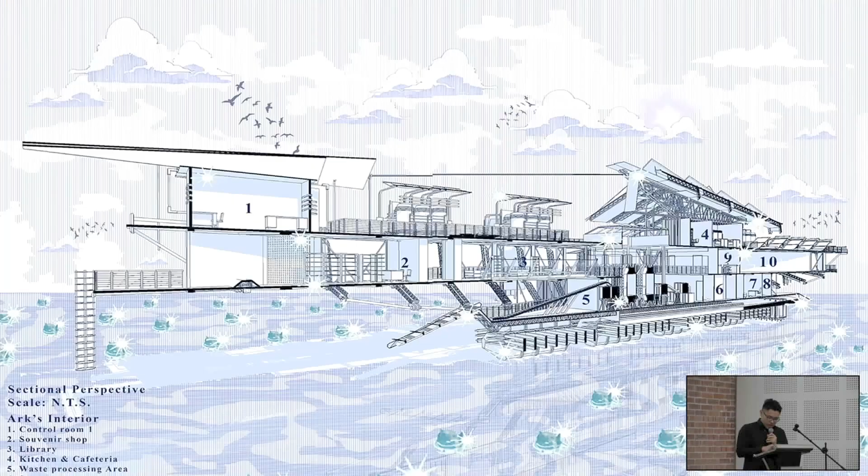Metaphorically, anticipating a speculative event allows us to predict the worst possible postulated outcomes of anthropogenic ocean pollution in the next few decades or centuries. This anticipatory ark is deployed to clean up the marine debris around Semporna.

In our quest to repent what we have done to nature, anticipatory ark emerges solving the issue of ocean debris in Semporna and eventually the 5 oceans in the near future. It is essentially designed to function as the mothership debris harvester, as you can see from this sectional perspective, patrolling the site.

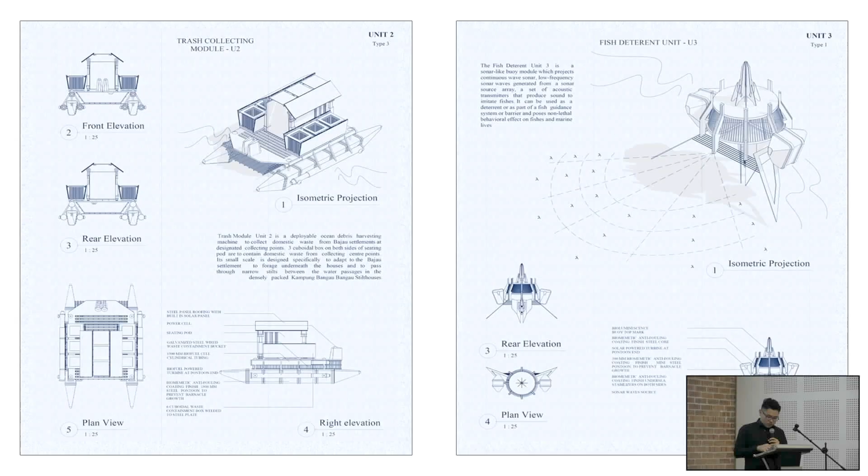It has deployable high-tech subunits like trash collecting modules, fish deterrents, and microplastic filter feeders designed specifically to go into narrow areas under the stilt houses or unreachable areas to harvest various types of ocean debris ranging from microplastics to large floating objects.

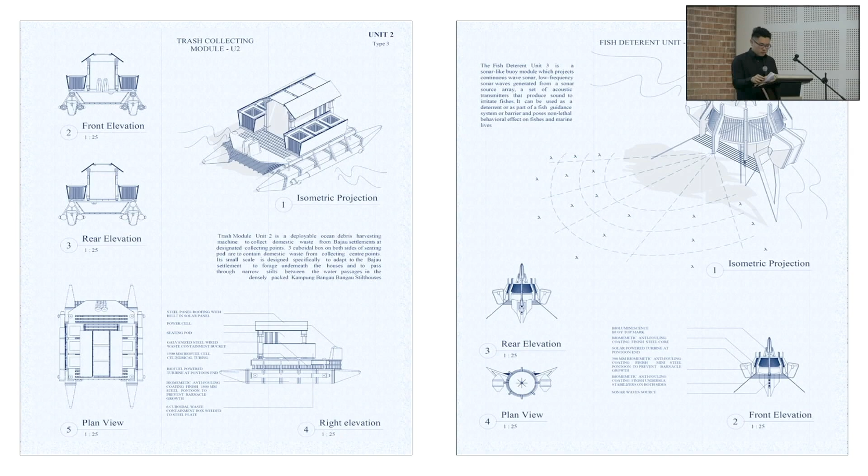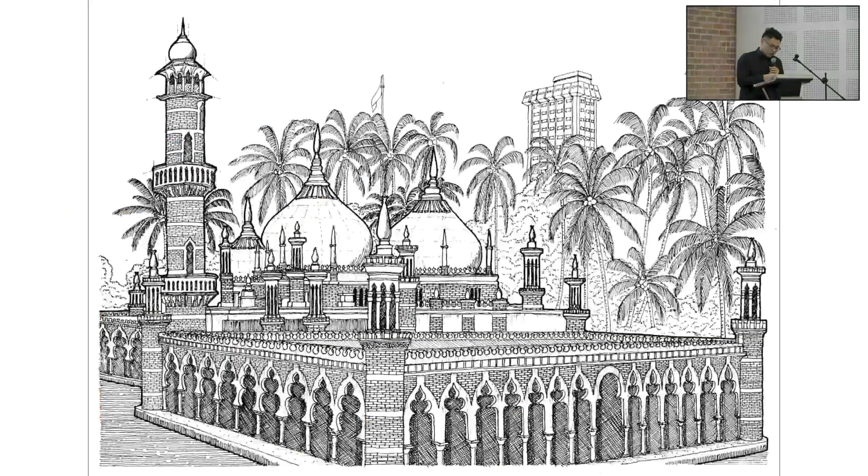So moving on to the next one, you see here is the competition hosted by PAM in early 2022, the Masjid Jami' Sultan Abdul Samad sketching competition. So this is my submission. I did the black and white fine liner sketch. I use this style because honestly I'm not very good with colors, but it also emphasizes the essence of the subject.

By highlighting the intricacy of the lines and details, it evokes a sense of timelessness, showcasing the embodiment of a deep cultural and architectural heritage. This unique combination of Indo-Saracenic, Mughal and Moorish architecture style mosque is also one of the oldest mosques in Malaysia, located at the center of Kuala Lumpur, where the two rivers, Klang and Gombak rivers met.

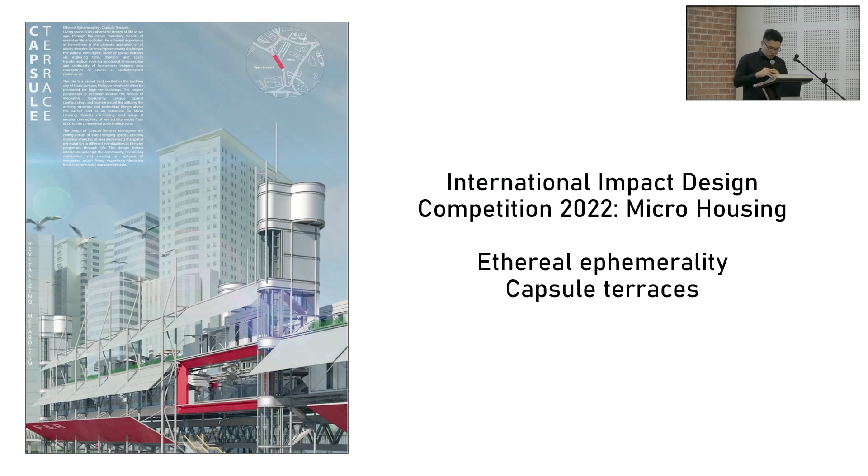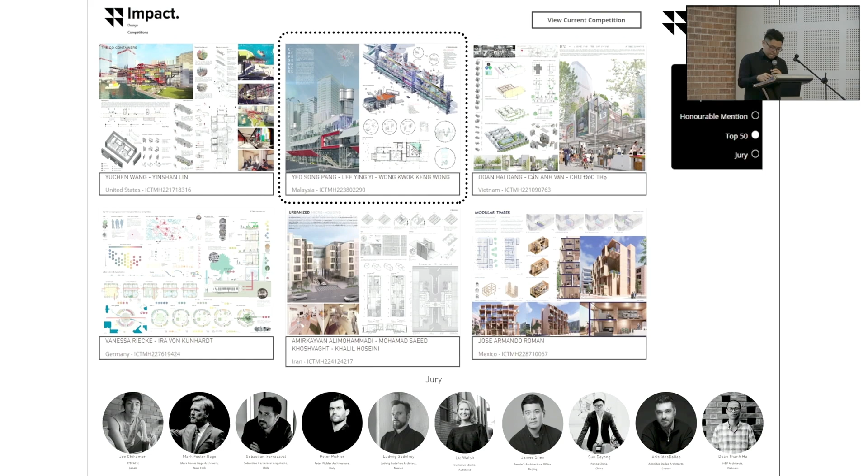Coming to the third of the quartet, the International Impact Design Competition, Microhousing. This submission was done in a team of 3, including me, led by a senior of mine. The brief is to design a prototype of a microhousing unit of less than 35 square meters that reflects the personal needs and culture of the residential community, chosen in an urban context with a relevant site.

Each unit comprises a sleeping space, a common sit-out space, a kitchenette, a bathroom, and storage. Space-saving and multifunctional furniture are key elements that tackle serious space crunch issues. The notion here is to accommodate more units on lesser floor space and at an affordable price point, especially in dense core neighborhoods or next to a major transit route.

The site chosen is a section of the Link Bridge adjacent to the vacant land and Menara UOA, tucked within Bukit Bintang and KLCC area, which will often be prioritized for high-rise building. My team and I tackled the brief by utilizing the existing pedestrian link bridge above Jalan Perak as an extension for micro-housing units. Besides minimizing land usage, it ensures connectivity of key activity nodes from both Bukit Bintang and KLCC to the commercial zone and office zone.

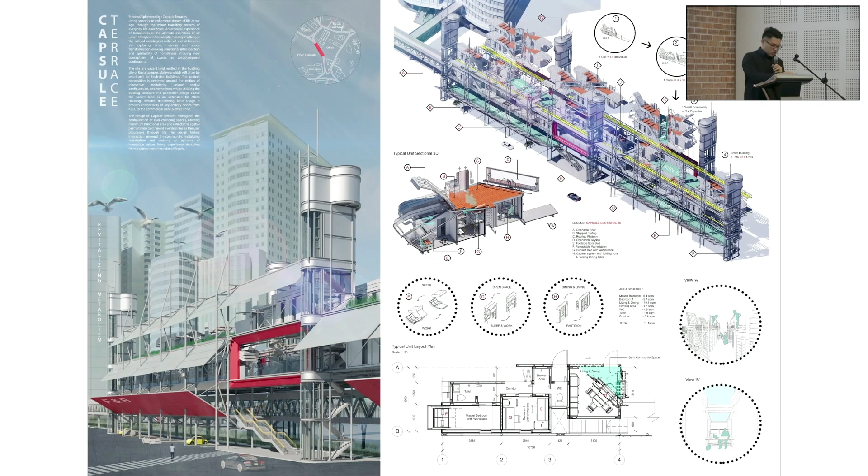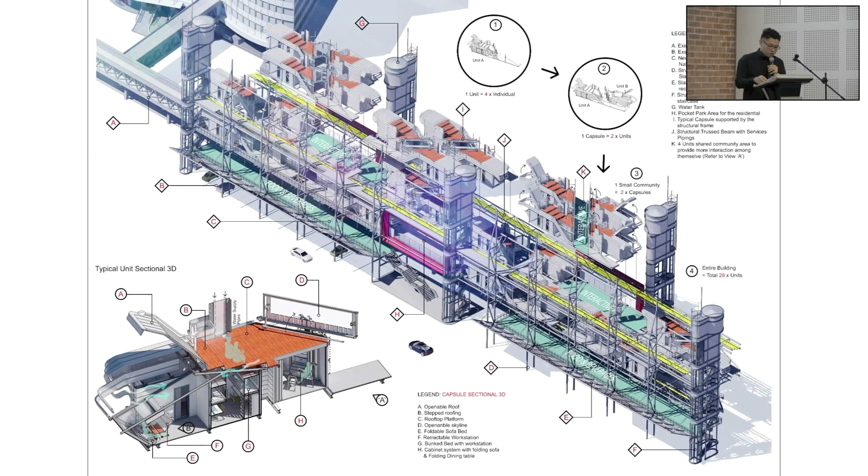Ethereal Ephemerality, the title, literally means otherworldly impermanence, challenges the natural ontological order of spatial features via exploring time, memory, and space transformation, evoking new conceptions of spaces as spatio-temporal continuants. The ideation of capsule terraces in micro-housing reimagines the configuration of ever-changing spaces, utilizing maximum functional area, and reflects the spatial permutation to different eventualities as the user progresses through minor transitory records of everyday life anecdotes.

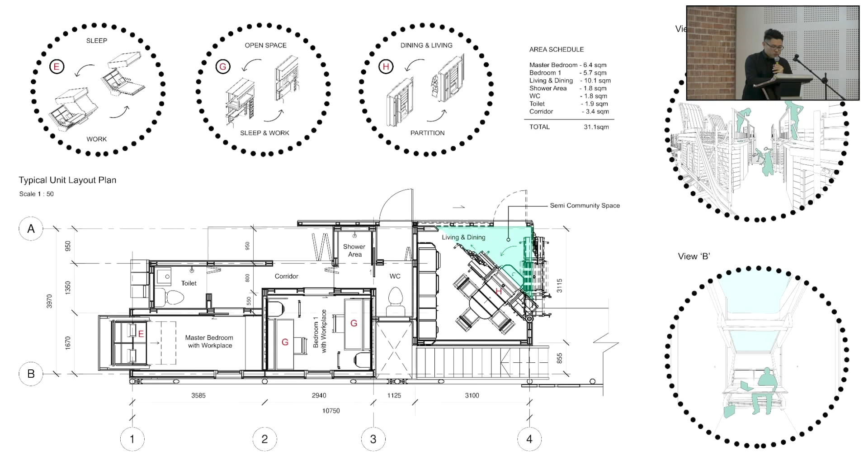Each micro-housing unit comes in the form of a prefabricated capsule assembled on-site in a uniformly terrace-like manner. The design is suitable for white-collar groups, professionals, or even expats, creating the epitome of an ethereal and ephemeral urban living experience.

Last but not least is the submission for Penang Light City Urban Sculpture Design Competition. The brief is to address Penang as the Pearl of the Orient, a gem and a melting pot of culture. The pearl symbolizes the island, and when sunlight shines upon it, everything comes alive. Light epitomizes the essence of all life, but for life to form and flourish, water must be the cradle.

So I did 2 submissions for this project. The first submission is the Light Axiom, meaning the principles of light. The sculpture proposition is again centered around the notion of light, followed by water as the core of life.

The design is inspired by the resemblance of Penang in Malay, which means the island of areca nut. Light and water metabolize the areca nuts, a symbolism of life, which are embedded in the acrylic rods at each tip of the sculpture. And when dusk falls, the sculpture will begin to light up.

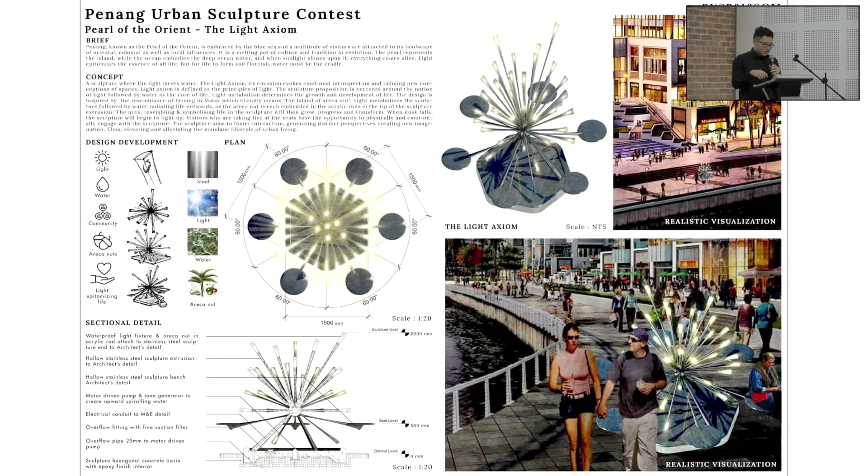This is the design process and the final rendering of the sculpture.

Proceeding to the second submission is the Spectrum, defined as the range of colors produced by the separation of the components of light by their different degrees of refraction according to wavelength. The idea is based on the concept of spatial contemplation using fundamental forces of nature - light, water, refraction, and reflection - to stimulate a whimsical user experience towards the sculpture.

The design is inspired by the resemblance of Penang Island as a shining pearl in a clam, surrounded by vast ocean water. The sunlight hits the water, and the opalized finishing beneath creates a spectrum of rainbow-like colors as the water undulates perpetually. The sunlight then refracts from the water and finally reflects to the warped steel surfaces, demonstrating how the users are seen as the pearl encapsulated by the sculpture.

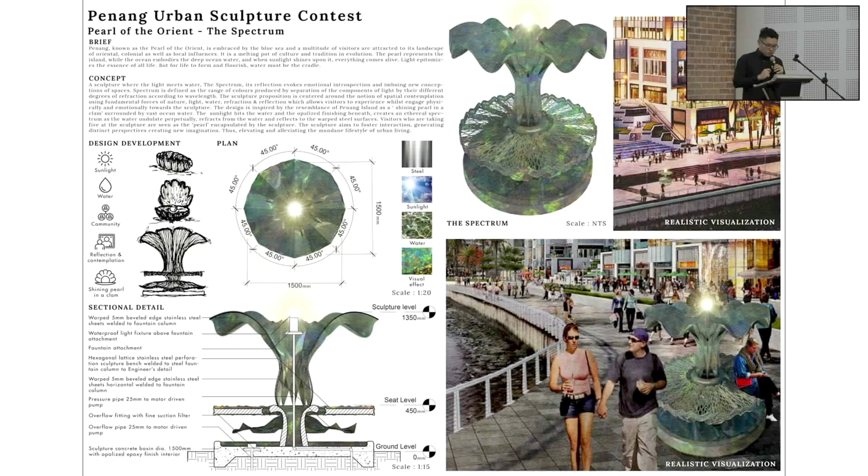This is the design processes and the rendering. I personally like the first one better. However, this submission was the selected one because it follows the brief.

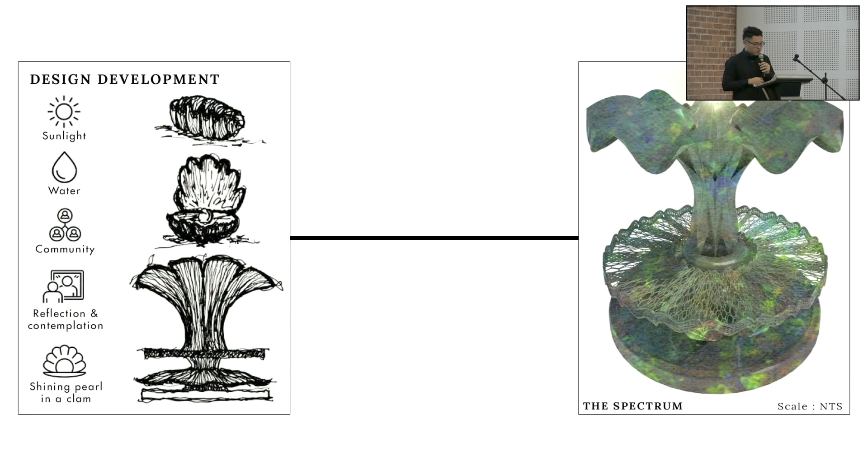And so I've come to the end of the sharing, and thank you for your time. I hope my sharing benefited all of you here today. Thank you.

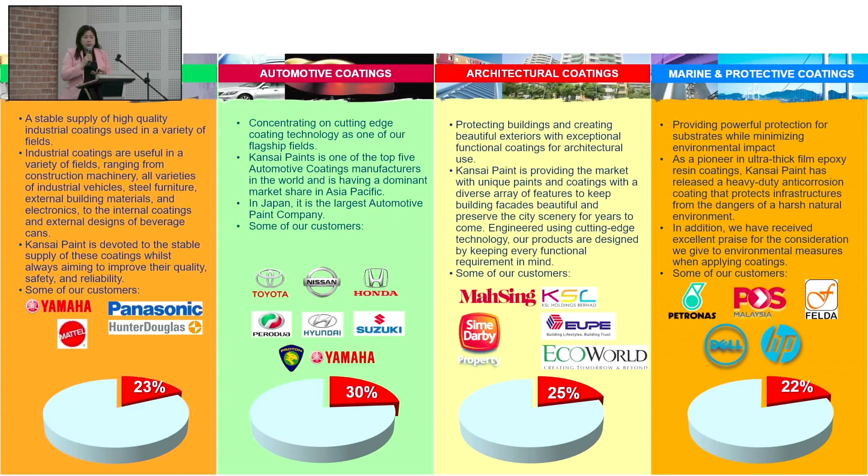So this is our report card, not so high profile, but actually we have quite a good reputation globally. We are number 1 in Japan for automotive coating and number 2 in Japan in group sales. And in Malaysia, we're actually number 3.

Number 3 in Asia Pacific and number 9 globally, so we are among the top 10 paint and coating companies. We have Kansai Paint, 100% owned by Kansai Japan, and Sime Kansai, 60% owned by Kansai Japan and 40% owned by Sime Darby Motor. And Sankora, one of our partners, owned by Kansai Paint. If you have used texture coating before, this is actually under the Sankora brand. So all under our Kansai group.

Besides that, we are the leading automotive coatings provider. Most cars in Malaysia are actually using our coating, I would say 80% of the market share. So no matter the brand, you are likely using our car coatings, which protect your vehicle under the sun, under the weather, or even rain. We apply the same technologies into our coatings as well.

Now car coatings have already moved to water-based. You will be surprised, Perodua is the first company that actually used water-based coating for their top coat.

We also supply to the biggest toy car manufacturer in the world, Hot Wheels, all using Kansai Paint, because this one has to meet child-safe requirements, since we expect children might bite it. So this product is actually produced on a special production line, because they have to be aware of other chemicals.

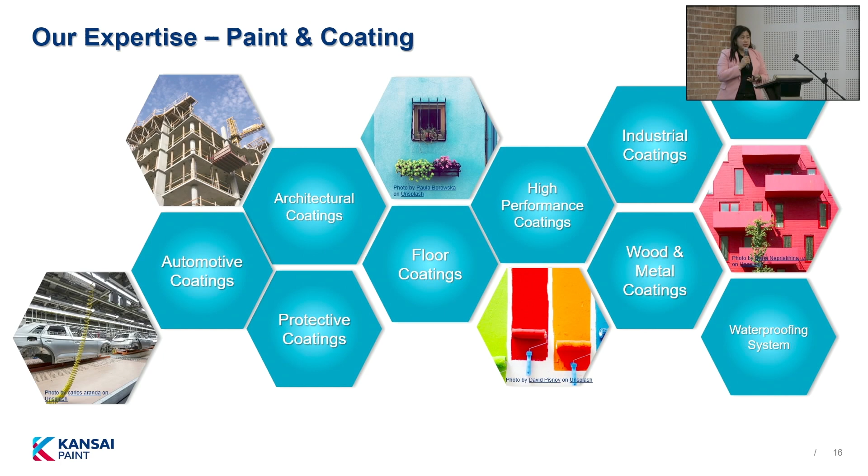And of course, for exterior, whatever we mentioned is used for most of your building and design. So not to worry, I have my color consultant team to give you a color scheme. If you have problems choosing color, let us advise you.

For interior, I have a wide range of products. Whatever we sell to project, the same product is available in retail. We don't do any different grade for project or retail, all our products are one grade for both segments. That's why I welcome you to my factory to see how we do our manufacturing run. We don't actually have different qualities for project versus retail.

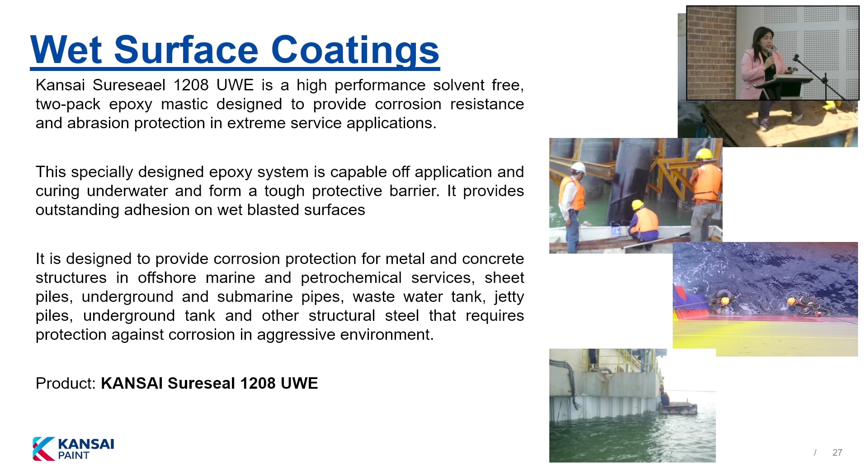So today we'll highlight more on the protective coatings. I think most might not be aware that we actually have a lot of good products. This is underwater epoxy, which we supply a lot to offshore, especially for bridges, jetties, or whatever is painted under the water, because you cannot remove the seawater. So this is a solution for you.

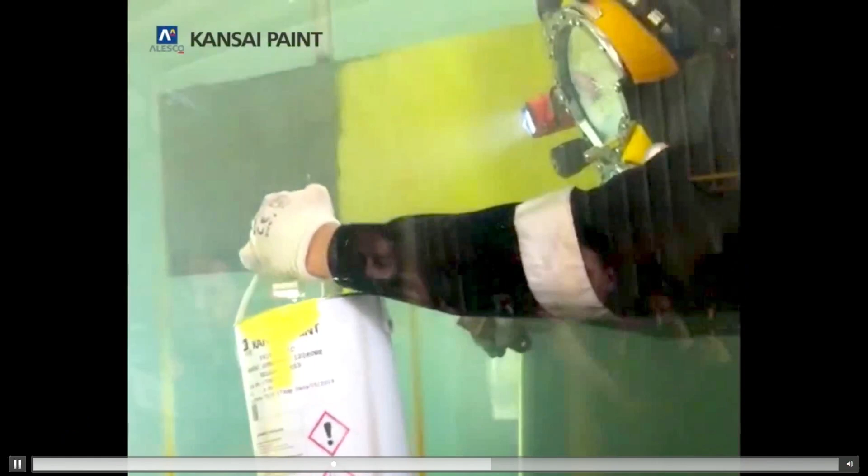I think just now KK did mention you have an ARC project. I think maybe you need this product for your project as well. So this is our technology, and we sell quite a lot to oil and gas, especially offshore, and also for bridges. We also have anti-carbonation coating, one of the JKR aspects, if I'm not mistaken.

We completed the Penang Second Bridge. So they are now doing a tender job, it's going to kickstart soon. It's also a Kansai product.

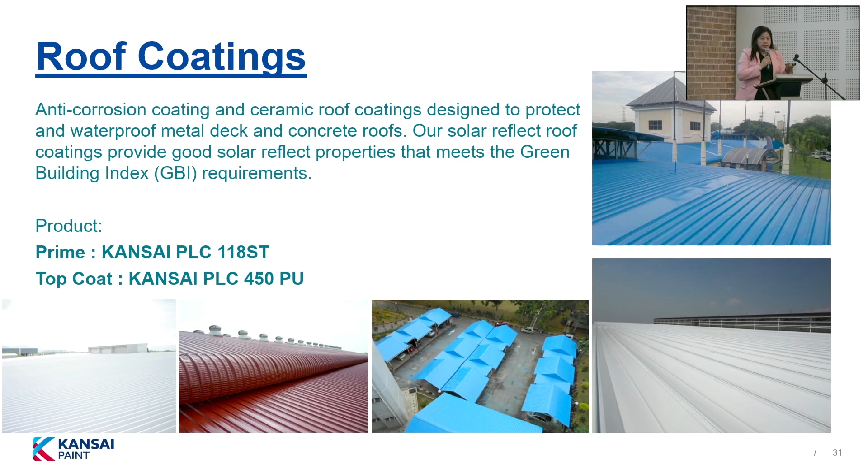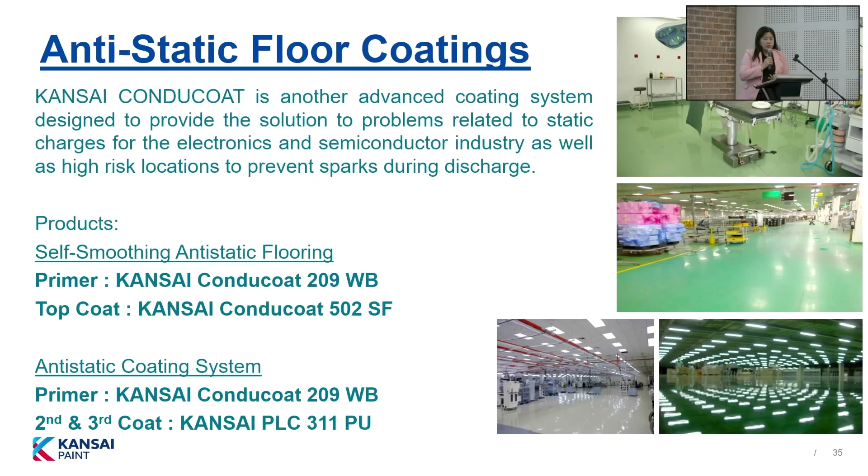And of course, the roof coatings. This one is more on the higher grade compared to normal roof tile paint, which falls under decorative. And this is what we do for your metal roof repainting. Yeah, some of our projects. And of course, we have concrete protections. We also have anti-static floor coatings, epoxy flooring, which we also have in retail.

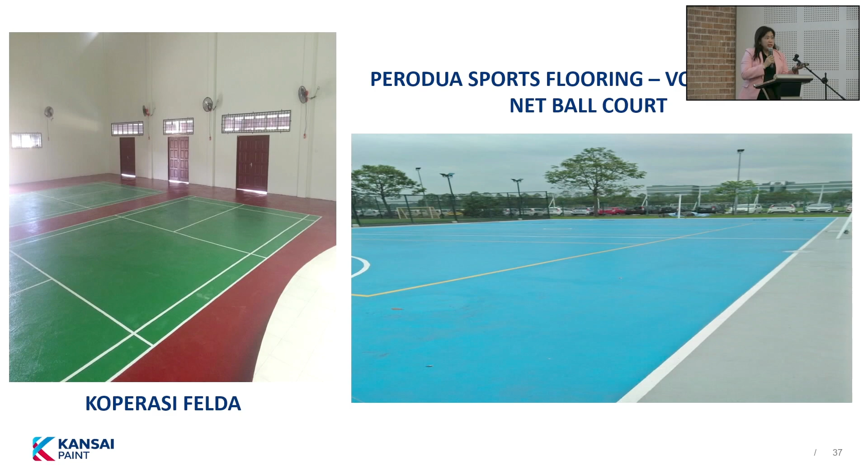And you can have some panel outside, which we brought it also. And we do some sports flooring. And recently, we also do some pickleball court. I think it's quite famous, the latest project actually takes up 7 colors for a pickleball court.

Our team actually gives you the proposal of what color to use. This is along Federal Highway next to the Subang Perak area. Yeah, this is Aurora @ Subang Jaya by Sime Darby.

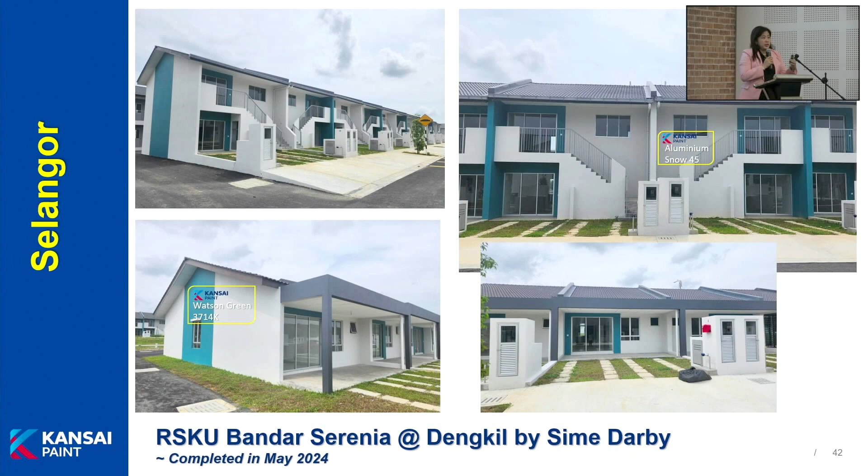And also we completed one Rumah Selangorku, and this is the color that we proposed. Of course, as we know, exterior color is sometimes a bit sensitive. That's why we have our color consult team, our spec team, to choose the right color for your project.

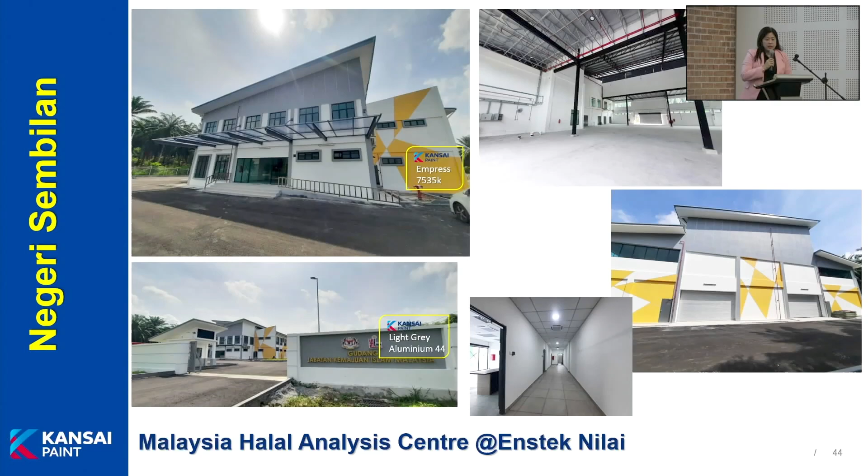This is our project, and we also do a lot of repainting in this segment. And for Aeon Bukit Indah, they are using exterior paint for interior. Yeah, they are using our Kansai weather coat for their interior.

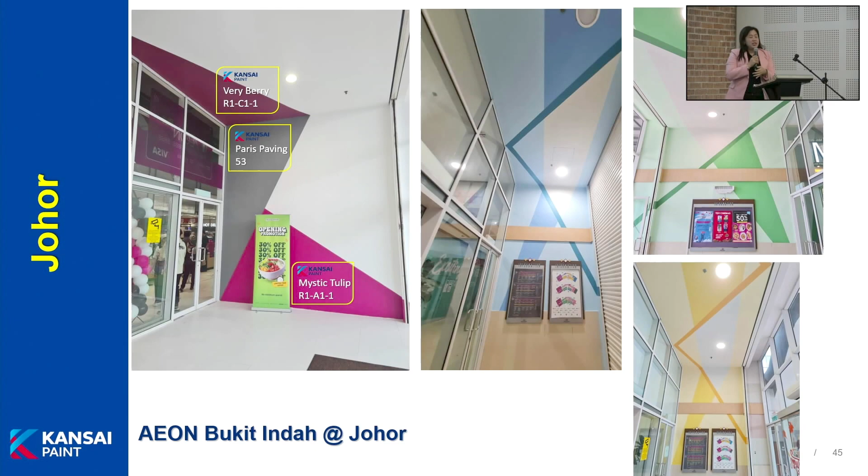That's their requirement. And also, we have a Tabung Haji project, which we have 2 different tones of green and gray. So in our Kansai, we always look at solutions for our buildings, how to make them better.

So this is one of the projects we done in our own factory. We have a very serious crack wall, you can see. So we painted this in October 2023, which is actually more than 12 months ago.

We actually wanted to see, if let's say we don't repair the crack line, would our product settle this problem. So after we checked, after 12 months, more than 12 months, actually it really helped. The building crack doesn't expand, and the paint color also hasn't faded after 12 months.

So we always have the solutions for you. If let's say your building has any problem, come and talk to us, we will give you the solutions. Of course, this is not a normal paint and coating, it comes as a special coating.

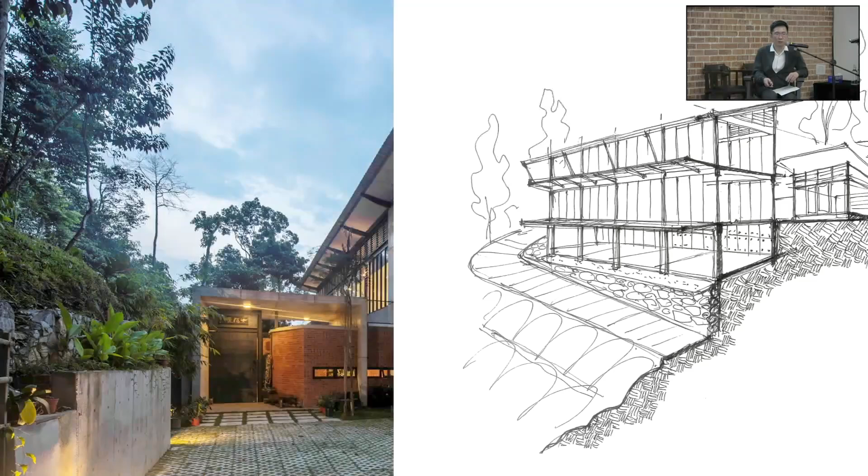This whole pavilion is a 2-story wing. It's actually the living dining room on this level, and then all 3 bedrooms on top. So this is the entrance gate, and then there's a moon gate here. And then the last function, the third function, is a guest room wing.

What he wanted is because he traveled quite frequently - this is before COVID - he wanted the building, the guest room and the pantry and the kitchen area to be able to be used by his relatives or friends or people close to him when he's away, without disturbing his private living dining space and things like that.

So it's with this program, plus on a hill slope and a limited flat area for the courtyard, so we try to derive a schematic and layout to try to have all these different functions staggered and layered together.

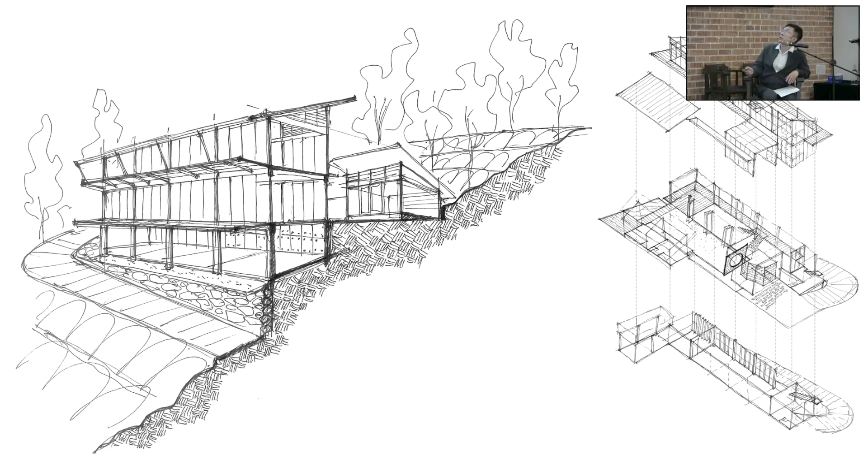Okay, so this is how it started. This is the flat area, roughly. Before I start, there's a first flat area here on site. This is a car park for the public, for his friends. So from this flat area, you can walk up here or drive up here. So the private car park is on top.

So this is the gallery and his studio. And then this is a living dining, kitchen, and then this is a bedroom, this is a courtyard, and then this is a pair of guest rooms on the other side. So, and then if you look at...

If you look at this axonometric, this is a road coming up, and this is an entrance, and this is a gallery, and this is the artist studio, and then there's a flight of staircase going up here, reaching this entrance statement, and from here there's a moon gate, and then you're facing the courtyard.

And as you can see, this courtyard is flanked by buildings on three sides. One is a 3-story building here, and the other side is a pair of guest rooms, and then there's a private corridor, and then this wet kitchen here. And then on the fourth side is surrounded by this infinity pool.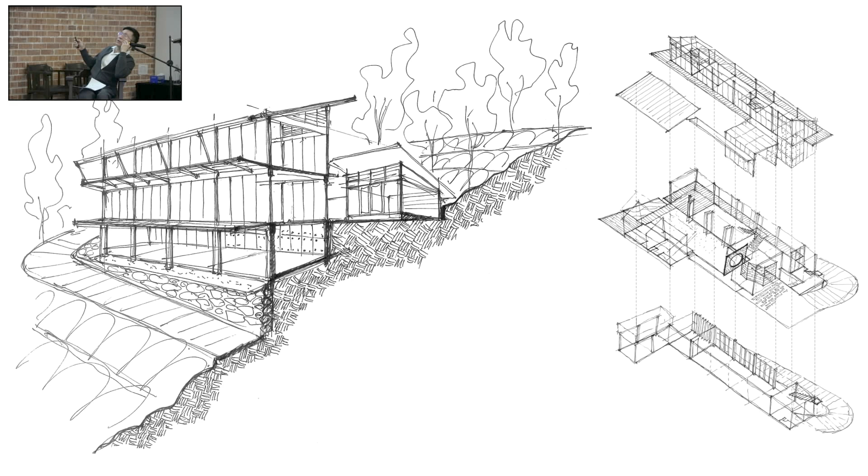So from this side, if you look out this way, all the way, you can see Genting Resort. And then you have a private staircase on the inside. Then this one can go up to, on the first floor, there are 3 bedrooms here for him and his kids. So this is a very simple but sometimes yet quite complicated layout.

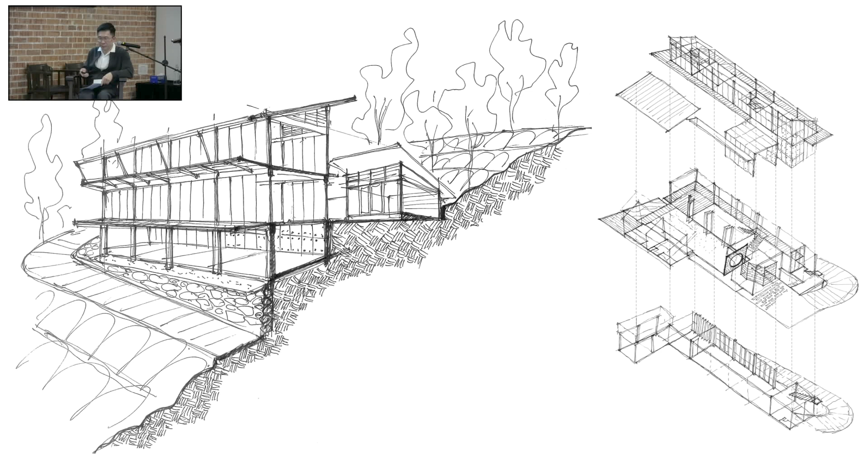Yeah, so this is the plan. I think I'll hold it.

Hi, okay, this is the plan. So this is the driveway coming up. Oh, much better.

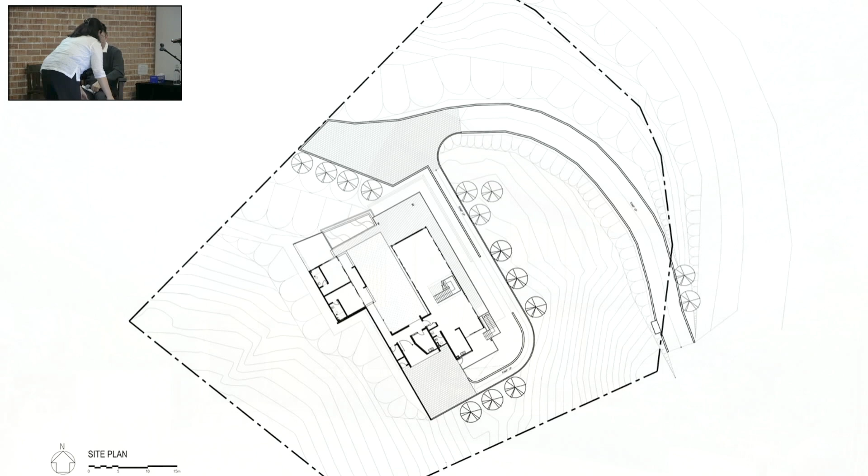Okay, this driveway coming out, this is a public car park. So you're coming out to here. This is an entrance and then the moon gate. And then this is a private wing. You notice that here at the end of this private wing, facing the Genting Resort, and so is this swimming pool. This is where he hangs out most of the time, and then there's a courtyard here, and a pair of guest rooms here.

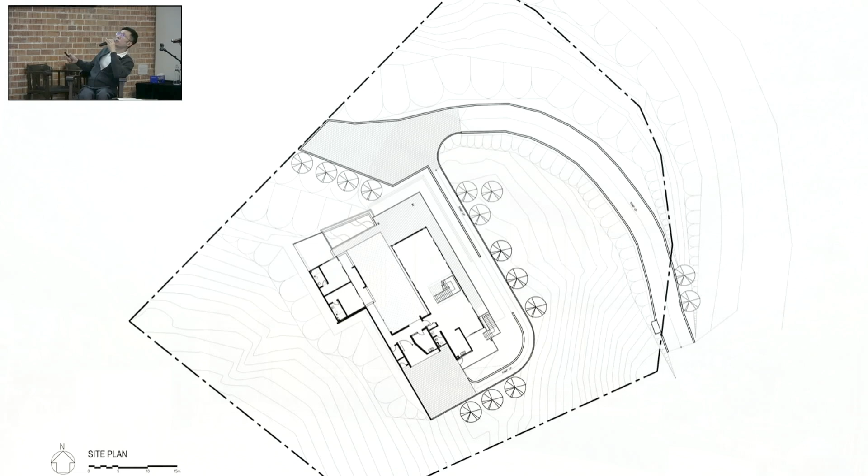So meaning that the people who stay in this guest room, when he's away, he just has to lock up this door and all the glass doors here. So people can continue to use the pool, and maybe make some Maggi mee here. I myself, with my family, stayed here over one weekend when he was away. Test first.

As I mentioned, the existing site elements are quite important when we adopt the design. As you can see, these are stones discovered on site, so we use them as part of the retaining structure. There's also some timber on site, but untreated timber we wouldn't use structurally, maybe for landscape elements instead.

The whole building, the 3-story wing, is staggered up. We try to make the design look light, especially on the top two floors—that's why some structural members use steel I-beams and things like that. The lower ground floor, the gallery, uses heavier off-form concrete.

Even though this is quite a modern design concept, for this house we try to infuse traditional elements, like wood, and to a certain extent vernacular elements too. We try to play with different elements. We also didn't want a hardcore, cold modern building in Janda Baik, where the priority is actually the landscape and the trees around it.

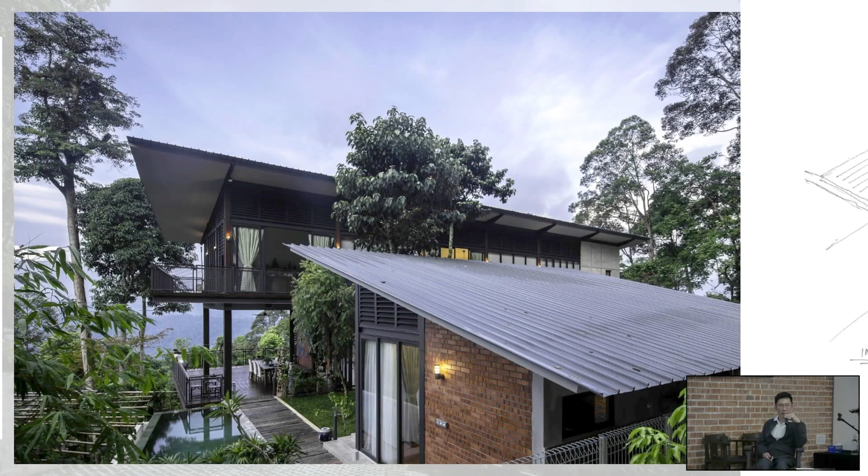Okay, then as architect for this project, we also try out different detailing. What we tried here is to run a staircase. Usually we have an I-beam stringer, right? But a single stringer or double stringer, I thought it's a bit boring.

So we tried to have a bit of fun. We cut the stringer into half, so it becomes 2 T-shapes. Then we flip the two T's together, and it becomes like a butterfly shape. Then on top there's a steel plate support, so it becomes like a butterfly kind of support, and a solid timber plank rests on top of it. Sometimes when we do this detail, frankly, I'm also not sure how stable it is.

So until it's up there, then you can see another staircase with a single stringer—some of my young architects went out and jumped up and down, so it's so far so good. That's the beauty of doing a bungalow—there's a slight flexibility, not too much. Well, at the end, safety is still paramount—we cannot compromise on safety.

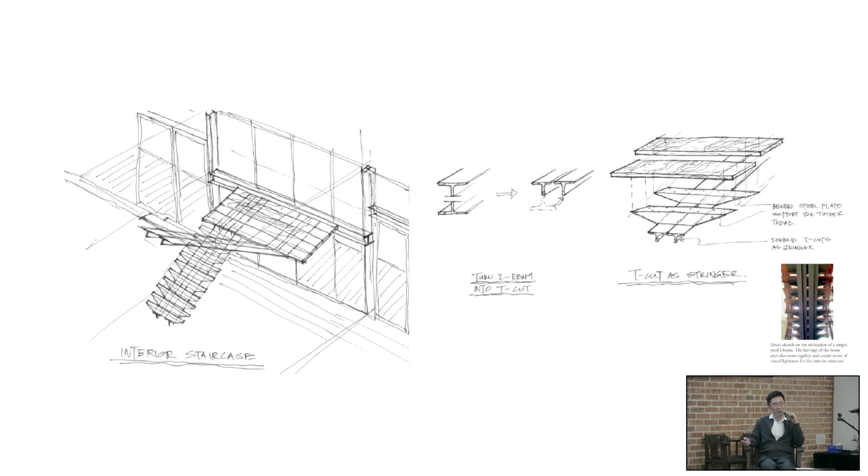So just now the butterfly staircase is this one—you can see here from the underside. And then this is a single stringer staircase. We actually reduced the size a little bit—the original size designed by the engineer was too humongous, and it looked really bad. So we reduced the size a bit, and it looks okay, and it's holding up well.

So ever since then, I've been using the same, similar detailing, with cantilever, one beam, things like that. Sometimes the owner says he is my guinea pig, you know, so I try this out on him—partially it's quite true. So this is the balcony.

This is an important element of the building, roughly about 2.5 meters in cantilever. Even the handrail is all wire mesh, and at certain height there's a timber handrail. So in short, whenever your body touches a certain architectural element, to create a certain level of comfort, I would instill some kind of timber—though not everything is timber, because that's just not right.

And then you notice the steel column here—the I-beam column is all cladded with timber, so that we can hide the wiring and cabling, the M&E, inside. And the timber board allows one to mount the wall light. So there's a lot of this kind of detailing we have to work through—it was an interesting experience.

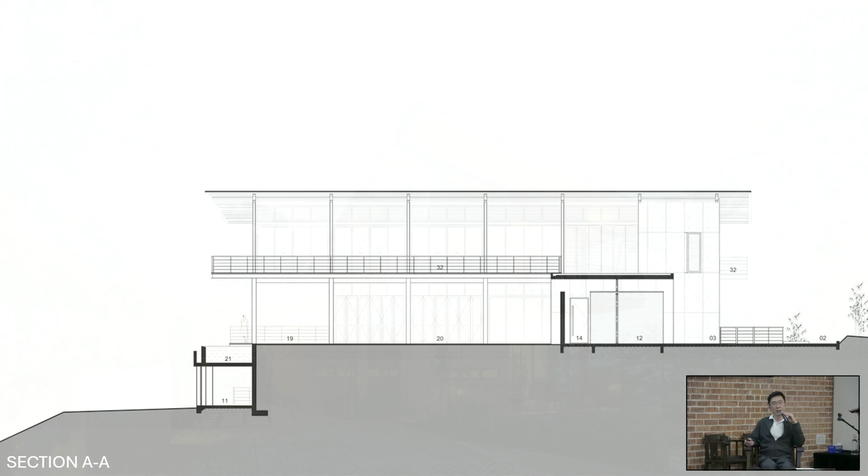So this is some of the design, the section of the building. This one is cutting through the Moon Gate and the infinity swimming pool. Then this is the main section.

This is important—as I say, this is a flat platform available on site, so we hardly changed it. We just trimmed the side a little bit to create a guest room, and here we allowed a 3-story wing. So from the courtyard, the building looks like 2 stories max, but from here it looks very tall—the first few photos, it looks really, really tall.

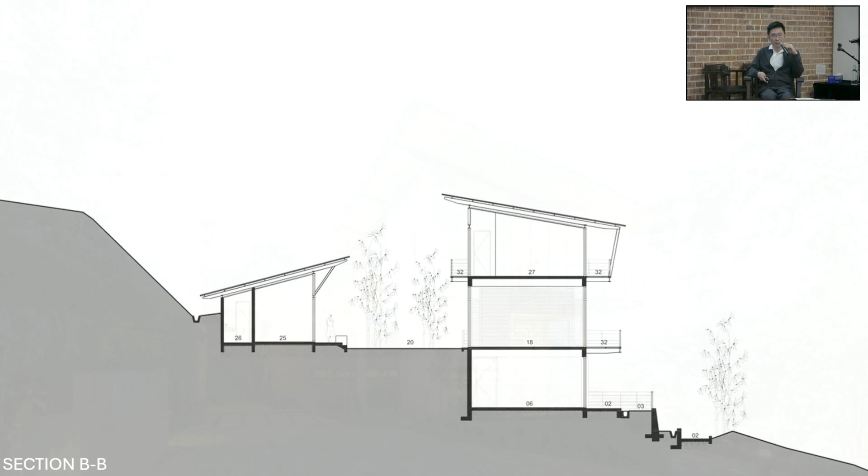Okay, so this is how it fits on site, which is quite a nice view there. It fits quite beautifully with the site.

Okay, second project is the Deck House. I did this probably 2010, 2011 at the time, so it was an experimental project. Again, this owner is also a very famous artist. That's why artists are doing very well, they hire architects. So another very famous artist.

When they first approached this, they just wanted a small weekend getaway house without any major function, any serious function, because they won't stay here for long. So the thing they want is about 2-3 bedrooms, maybe not a real proper kitchen, but some kind of pantry. But they enjoy outdoor life. As you can see, most people when they choose to stay in Janda Baik, it's all about outdoor, indoor is not so important. In fact, if the weather allows, most of the time they'll be outdoor, drinking tea, hanging out with family and friends, or cooking outside, things like that. So that's why the internal program, as long as it's comfortable, I think it's good enough.

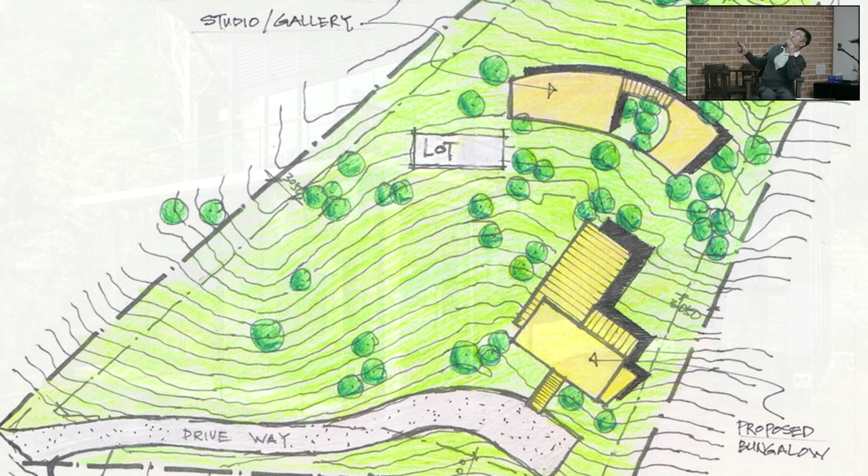For this site going down, I find that the major habitable space is more efficient if it's going down, and the client gladly accepted it. So when you first enter from the bridge - this sketch early on never got built, it's only this. You see the driveway coming down, you cross the bridge, then this is the main area. Then you have a series of flying terraces or decks, so when you come in here, half of it is a void, half is a master bedroom. You can go straight to your master bedroom or take a staircase down to the living room underneath.

You see the contour is fairly even. Notice that this is very important - the contour is fairly even, okay.

This is one of the earliest sketches, and at that time, 2010, there was no SketchUp yet. There was AutoCAD, but no SketchUp, so he had to still draw by hand.

So this is the idea: you have a car park, you walk over a bridge, and there's a void or a master bedroom on one hand. Then you come down, and this is a living dining platform with a big, huge flying deck.

At that time, I had a bit of fun. I thought I wanted to make this column really slanting, 30 degrees. My engineer objected - in the end, you only get 17 or 18 degrees, because they said it's too dangerous. So it's on this kind of language, the building grows slightly bigger as it goes down.

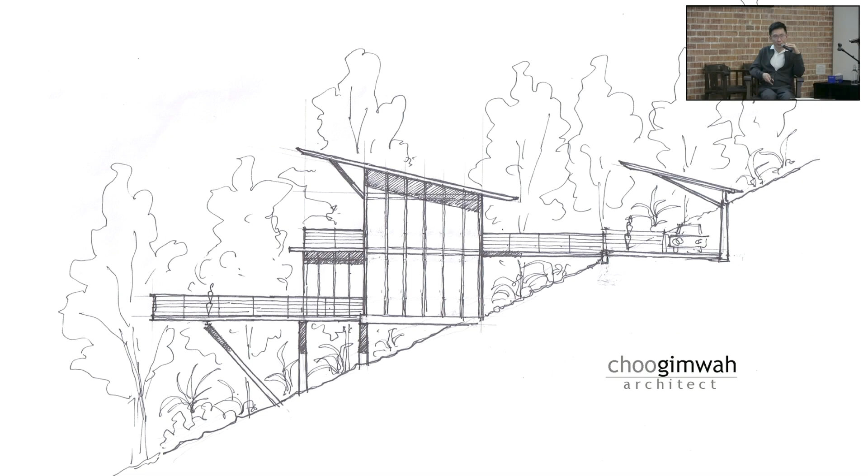Okay, so on the top left is the master bedroom at the highest level. This master bedroom has an almost 7-meter wide frontage. So imagine every morning you wake up, you open up all the sliding doors, you have 7 meters worth of view. It's quite breathtaking. On one side of the master bedroom, you can look down to the living room through the glass.

And then all this aluminum louver is for ventilation. So this house, practically, you don't need much aircon. Even till today, it still works quite well. Then coming down here into the living room, you can imagine this is the living area. This is the IKEA furniture, and then this is a small dining room and small dry kitchen.

And then this is the concept of the building. Since they like outdoor living, I always thought that normally we only consider infinity pools. So in this case, I thought if I have a flying and yet infinity deck, it would be quite good. So I gave it - this deck is like 13 meters long, 6.8 meters wide. It's like going all out. As you can see, at the end of this deck, a certain part, you can touch the leaf.

And then all this - but to make this look floating, again later I'll show you that you need quite a bit of exploring, tweaking, or detailing. And then this is the terrace - you can see a layer of terraces. This is outside the master bedroom. This is a balcony, going down is a deck.

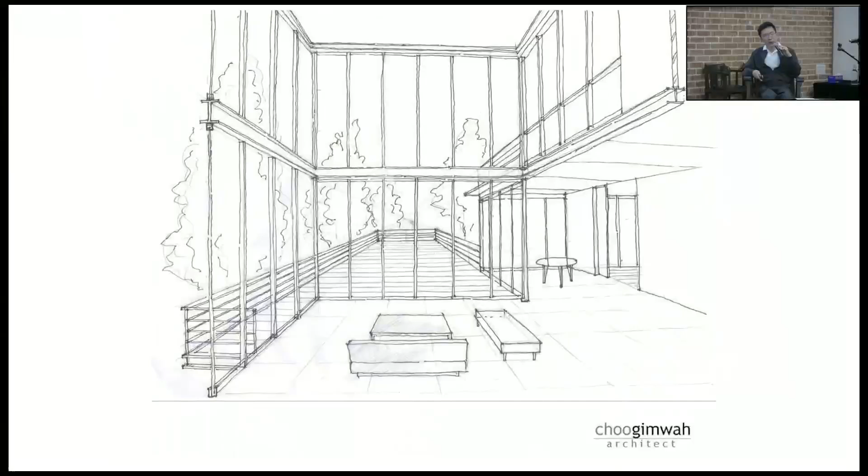Now this view, the space, is what I hope to achieve from the beginning. Again, without SketchUp, using freehand, there's no choice. So this kind of follows, but of course this one is almost a really long infinity deck, and I want the space to be as open as possible.

But frankly, over the years, a lot of people ask me, 'Oh, there's so much glass, would it be hot?' It's a valid concern. But fortunately, in Janda Baik, the heat factor is slightly less. If I were to do this project in KL or Bangsar, you'd have to be more careful, maybe not so much glass, more louvers, things like that. But in Janda Baik, you have a bit of leeway because the climate is slightly more moderate.

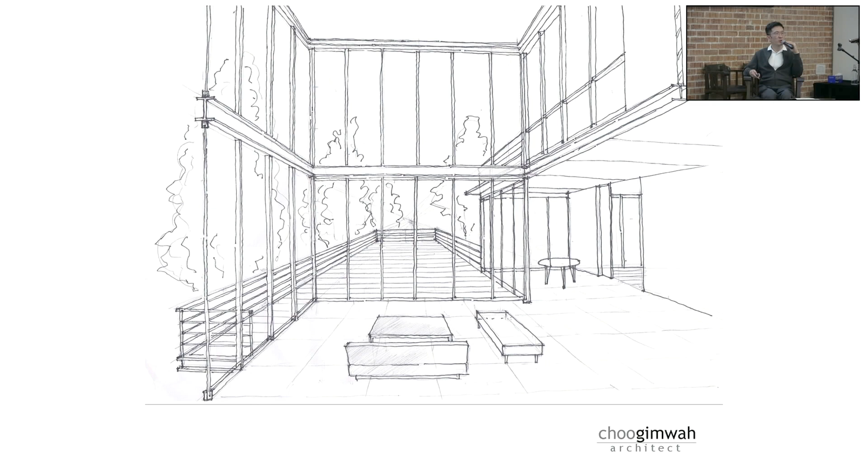So this shot is as important as the other shots, because it shows especially the deck, the infinity, how it layers. This last bit is cantilevered, on steel, timber, on steel anchored to the concrete. But from the outside, I wanted to make it look like it's floating, and this is slightly slanting. So this is actually quite technical. It's not as people thought, like wow it's floating, but it's very technical. We have to carefully construct each and every element.

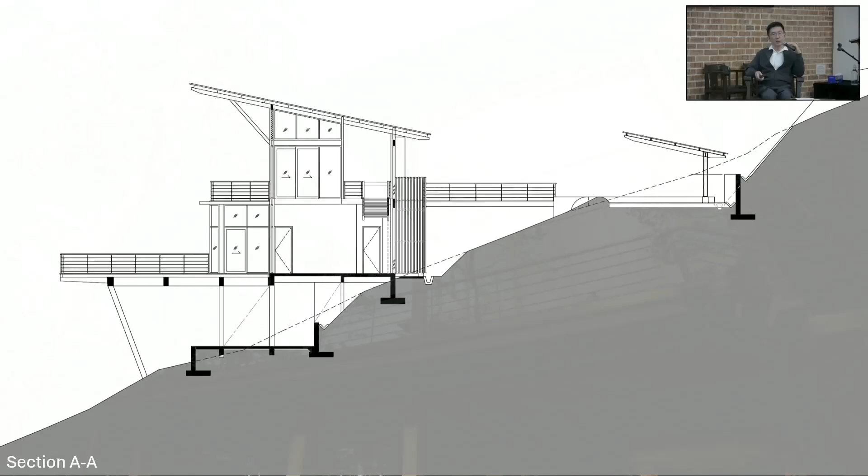This is a section of the building cutting through the deck. So the deck is all floating, it doesn't have a concrete slab. You can see the space, and on both sides they have a huge cantilever metal deck roof.

Okay, this one is this project called Small Haven. One of my friends advised me on this name. It's quite cool, took the client a while to digest and agree to this term. Anyway, this is a very, very small project, probably the smallest building I've ever done.

As you can see, this site, the owner and his family and friends bought up quite a number of pieces of land around the whole vicinity. So in the future they're gonna build a small village for the uncle, auntie, whatever it is. So to be sure, he wanted to build a tiny dwelling of maybe 1 bedroom to try it out.

See how he likes living in a jungle or semi-jungle environment. So for this site, the challenges are different. It's quite flat, in fact one of the flattest pieces of land I've ever worked on. So it doesn't have all this up and down hill, horizon view, trees. So it presents another layer of challenges. How do you make this? And furthermore, this building is visible from the road. The first 2 buildings can almost not be seen from the road, so privacy is no problem.

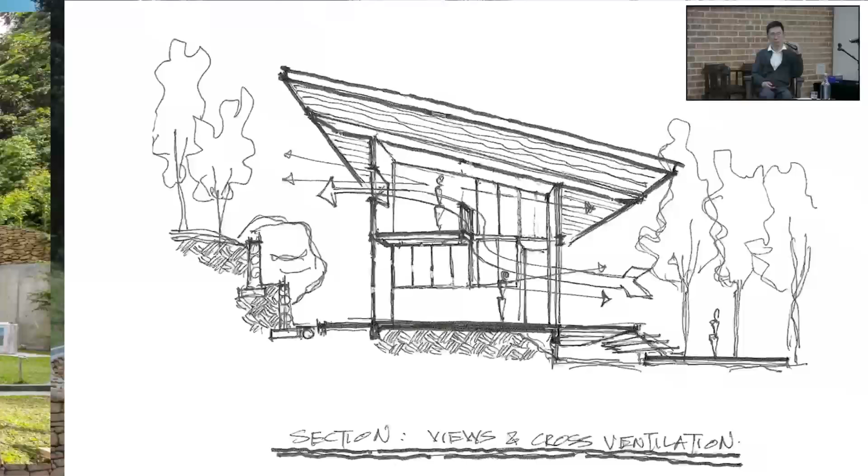Since it's a single story building, and because of the single pitch roof, on the higher pitch side I managed to achieve a mezzanine floor. So the one below the mezzanine is a dining and kitchen, and on top of the mezzanine is just a mezzanine. This mezzanine floor has a window on top, looking out, which other than allowing ventilation also allows a viewing point for future development here, because these are natural slopes.

Surprisingly, when they started digging for this project, doing the earthwork, they found quite a big boulder on site. So we did not move the boulder. We turned it into part of the focal point for part of the building. This is a humongous boulder, and it's quite majestic looking, which I'll show you.

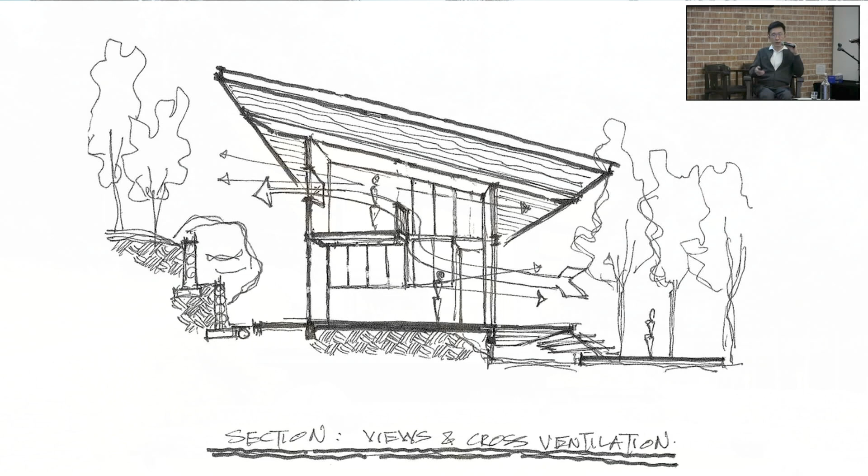This is the concept and layout of the building. Okay, lower platform coming out, timber deck all around. Again, we have a big deck here where they do most of the day-to-day activity. In fact, they have meals here, they hang out here, things like that. That's why in a jungle site, you always need some kind of balcony, deck, terraces.

Okay, and then this is the indoor. You come in, it's a small kitchen, and then there's a TV room here, and then a spiral staircase to go out to the mezzanine here, and the rest is void. And then this is the one bedroom, only one bathroom.

And then this is the boulder at the back. So this boulder serves as a focal point for the bathroom and outdoor tub.

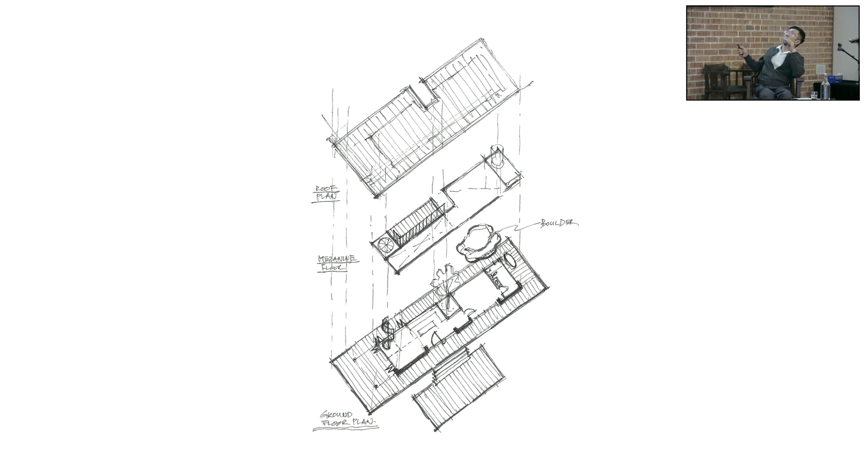So this is the site plan. Because it's going up a few tiers, we also use the rubble wall to form a few layers of terraces here in a random and organic fashion, so that it's not the usual kind of straight line thing, because the level going up is not very high.

So that's why this building, even though it's tiny, it's very small, but because it's so small we can do a lot of things that a 2 or 3 story building cannot. So as an architect, sometimes maybe when you're given a small job, it's maybe not so bad.

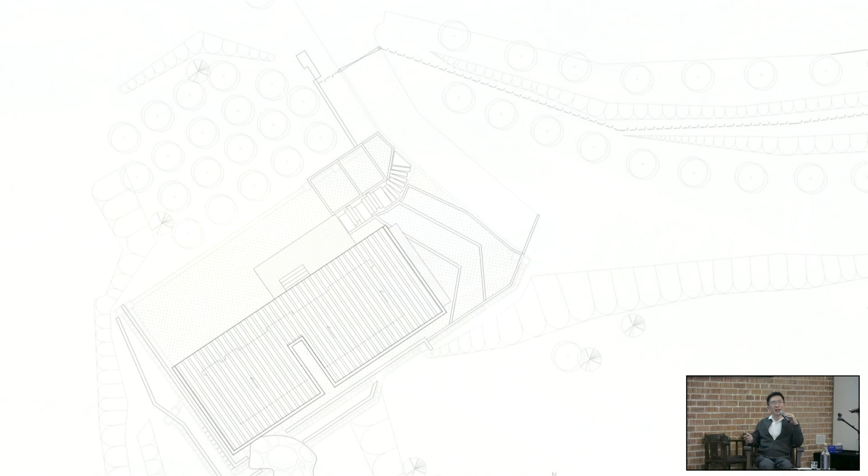So this is the section of the site. This one is mainly to show the platform. As you can see, a few landscape terraces, all again using the rubble we discovered from site.

Yeah, this is the building section. This is a mezzanine floor, all timber deck, all timber. This is not deck, this is timber plank.

Because this owner is into timber supplying, lumber, he himself has lots of nice merbau timber that he used for inside and outside. Some of the timber slab here is about 40, 50 mm thick, it's seasoned timber, seasoned merbau. He won't use it for outdoor unless it's right, and even though it's merbau, he told me he guaranteed it, because this is better than Chengal, since it's very seasoned, very old.

Yeah, as you see the deck here coming out, this is where they hang out. In fact, this deck, the owner told me, during the whole COVID lockdown, his family and the 2 kids stayed there. Quite nice, imagine COVID lockdown in such a nice environment. And the 2 kids would not sleep inside, they camped outside.

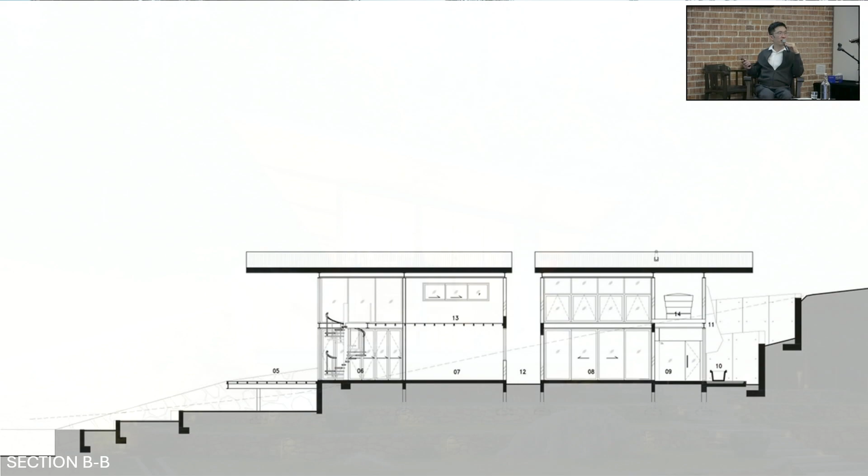The husband and wife slept inside the bedroom. The two kids had two tents, they slept outside. So they enjoyed it, you know. Of course, there were a few dogs running around in case an animal came in.

So even though again this is a small building, the outcome is quite nice. In fact, the impact of this building is not much less than some of the bigger buildings, you know, from my exposure dealing with potential clients, things like that.

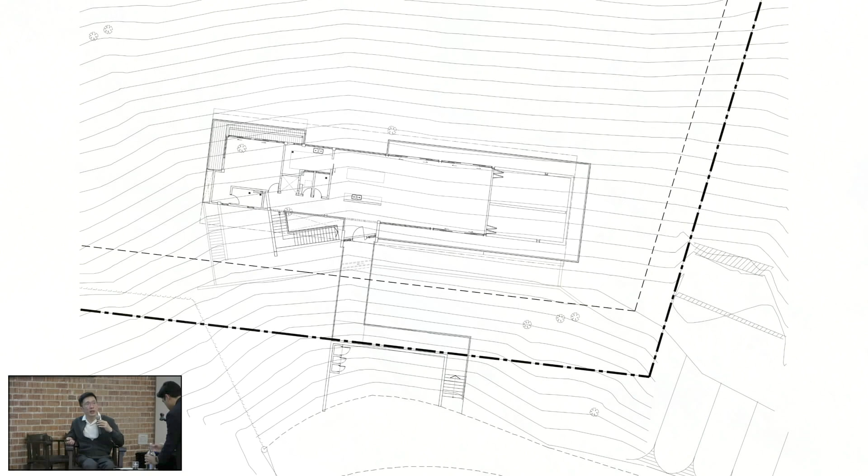The building platform at the lower level is about 4 or 5 stories below the public road. Unlike a conventional building where you always want the bedroom on top, you completely cannot do that here. Even the living dining room has to be slightly lower than the public road.

Then the rest just goes down, down, down, down. Even after dropping 3.5 stories, you still haven't reached the bottom. The bottom is still another 4, 5, 6 meters down. But given this context, as architect, we try our best to navigate the site, the contour, things like that.

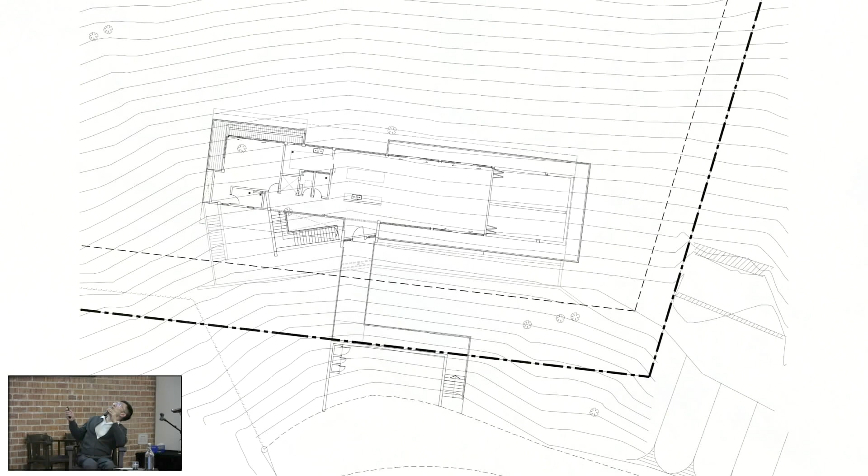Furthermore, there's a neighbor's house here, so I try to keep this edge of the building as far away from it as I can. Technically I could go further, but you see the contour here is gentler, while here it's much steeper. If I push the building more to here, the steel structure is going to get longer and longer. So there are a lot of these kinds of factors. In the end, this seemed to be a happy compromise of all of them.

In order to achieve this, we have three main floors and one lowest basement for M&E. Each floor is roughly about 3,000 square feet. And of course, with this very challenging terrain, it presents the most breathtaking view I've ever seen.

Because just now you saw some of it, a bit here, a bit there, but this one you see the whole Karak highway, the horizon, the mountains. So for this project, the main inspiration comes from the view. That's it, because the site is really difficult.

Even when they built it, I saw the contractor manage to get it done, it's quite something. Very courageous and very impressive. Even how to transfer the material down, imagine you're here and you drop down 5, 6 stories without a crane. Because this site is located at the end of one small road, I don't even think a crane could get up there. So if they manage to finish it, to me it's quite a nice achievement.

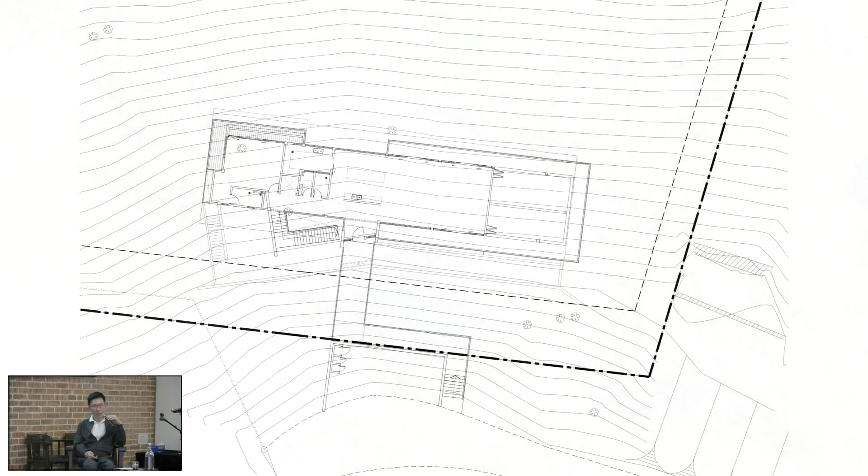So this is the final outcome. You can see for this one, the ground floor is about 1.5 meters below the road. I'm trying to bring it down more and more, but I want the roof to still be quite visible.

I cannot bring it down by one full story, because that means you wouldn't see the roof at all. Then it's not fair — people coming in would say, hey, where's your house? You cannot see anything. At least you should be able to see a nice, sexy roof, things like that.

So the roof must be a floating element, very light, with all glass underneath it, at least on this first part. And given that the building is very much like a typical shoebox, as an architect we also try to break up, frankly, the boring form.

That's why later you can see I try to carve up space externally and internally. Since I cannot change the form from being a rectilinear shoebox, the only thing I can do is carve out space here and there to make it slightly more interesting.

So at the entrance, I carved out a main entrance hall, a concrete box here, to receive the bridge coming in. This concrete box is also the first circulation element — the staircase going down. The house also has a lift, but I want the staircase, as in other projects, to be a main feature, and hopefully it will help define the space. So this staircase goes down through the concrete box, inside out.